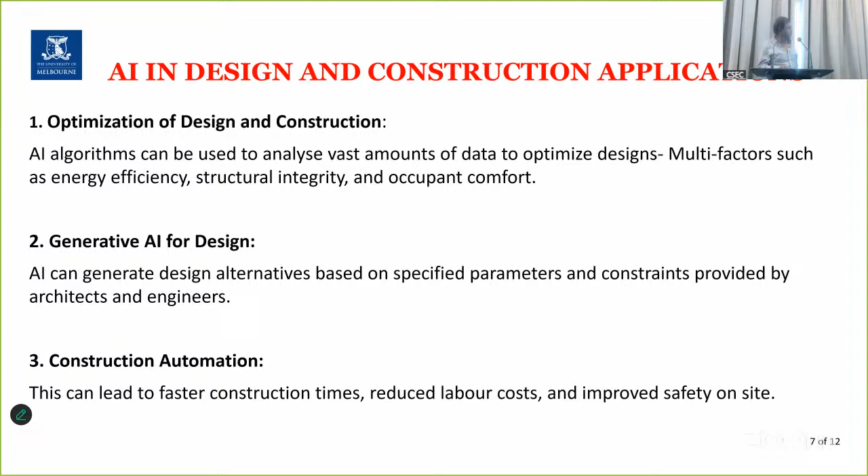Predictive analytics, that's where I think it will make the best contribution. AI, using the past building performance to predict future needs, and optimize operational efficiency. So, making predictions.

One example I can give is developing a site, using the best construction methods and technologies. Developers need to make some rough predictions of how much they should be spending on a project. With AI, for example, we can say: I want 20 stories, a building with so many apartments per floor, a certain number of 3-bedroom apartments, 2-bedroom apartments, and certain other things.

We give these instructions to the AI model, and it will give us the best optimized option, optimized layouts, and a rough estimation of the cost as well. All of this is built in, taking care of a lot of things we don't need to worry about, which if done manually would take a long time.

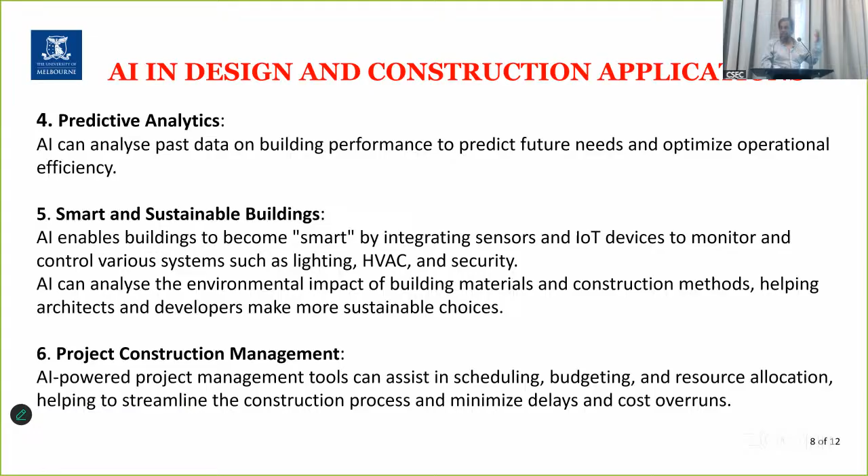I'll give an example of a digital twin, which makes construction management very easy and will reduce construction times. As an application to start with, this is CSEC has used - taking examples using the program Midjourney for generating generative designs, architectural designs.

The key features are automation and efficiency. You can optimize designs using AI, like a Midjourney type of program, enhancing processes, design option generation, and accelerated design process, which reduces the time we take - that's what I mean by making things efficient. It also allows us to bring different concept options and supports sustainability.

We want to be sustainable, we want to get to net zero - you may have heard one of my talks on net zero, but today is a different topic. Even AI can be used to help us achieve net zero quickly.

Now it's all about what's called text to imaging - that's where it really helps us. We give the text and get visual images in return. I gave an example before - we say we want a 20-story structure, and we give that in text. We type it in, and now we can use ChatGPT and all that to really go and type these things. So text to imaging is the key.

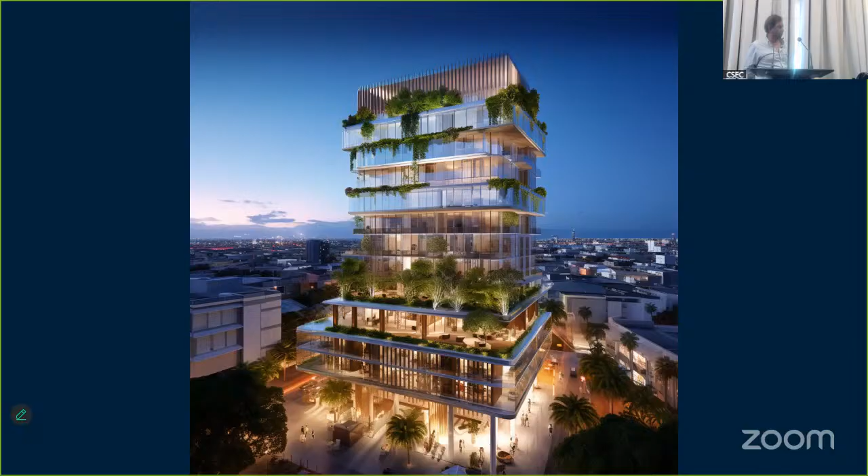I'll show some examples, case studies. Say we want a sustainable building, a green building. So we go and say, this is one of the examples generated here in this office, giving some of the options. And we say we need some greenery to make it sustainable, and we may say we want a green roof to get into a certain green rating. So with...

So many different things - we can't ignore sustainability these days. Sustainable buildings will become compulsory, or it's already becoming compulsory. To achieve that, we can use AI to fine-tune that and even give options. In the future, it's not done yet through these programs, but we can say we want a certain green rating - here in Sri Lanka we have a green building rating, but other countries have different ratings. We can say we want a rating of 6 or 7, or platinum or gold rating, and then get outputs. So these are through text - we talk to the computer through text and get the images back.

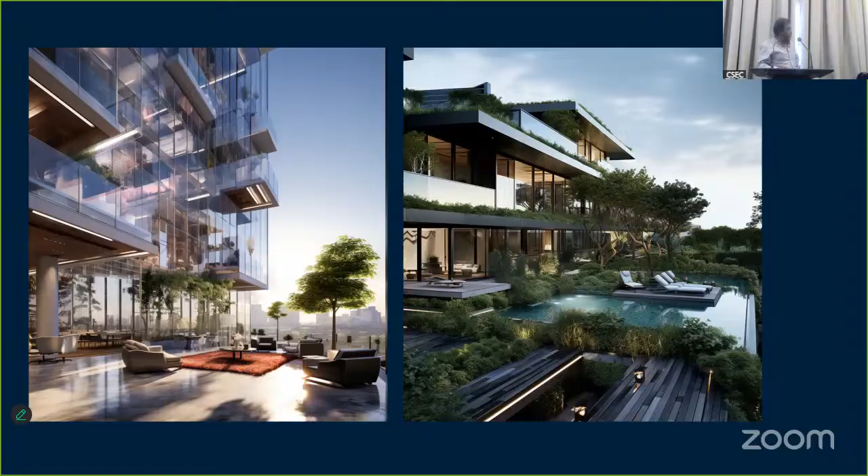Some of these options here were created from the Midjourney type of program. Today I'll only be brief on this, I have a lot of other things to talk about. Say origami type of structures we want generated - it would have taken ages to do this before, but now we just use AI. Hotel interiors, which is not easy to get the best interiors, but learning from past experiences and past mistakes, we can really come up with nice interiors. Interiors are in fact so important.

I'm going to get a bit more into some applications - today is all about applications as well. For example, forensic engineering - AI will help us a lot here. This is one example where there was a chemical factory fire in Melbourne. I'm taking this as an example of technology and forensic engineering in different ways. I was not involved in this one, so I can't present the ones I was involved in, probably not allowed. But this was in July last year, very recent.

So to find the causes, to find what happened, AI will go through some past data - how fires occurred, types of fires, all that AI will have. So we can use AI to determine why this happened. Rather than spending years and years on investigations, AI will give us some idea. This really makes forensic engineering easier - that's also a common thing now.

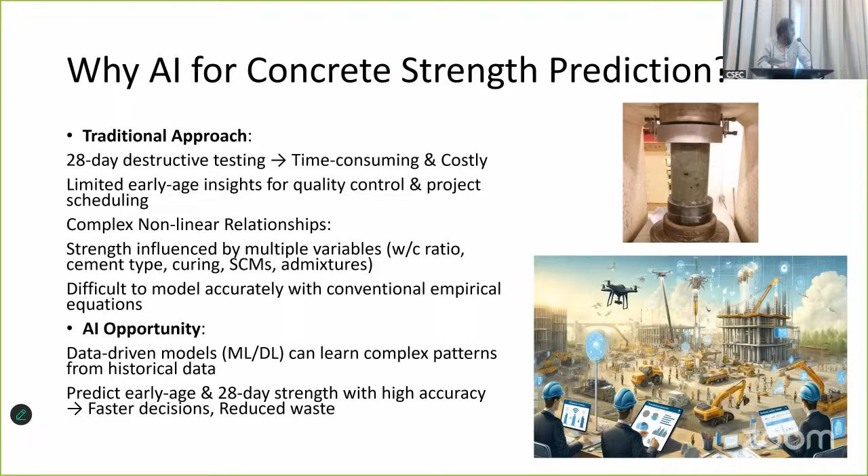So predicting concrete strength is very important. If you want to post-tension a beam, you want to do that in a few days, so we need to predict the concrete strength in 3 days. Sometimes we want to do the post-tensioning in 2 days, and that's very hard to predict. We can't wait to do the testing at 28 days from the concrete company.

So what we can do is fast predictions. We have so much data, we are collecting so much data every day - why not train a model? That's what we are doing here and also in Australia, trying to improve these AI models for concrete strength prediction. I'm sure there are others in the world doing this too, not just us.

So we are using some popular AI models, AI algorithms - you don't need to worry too much, but these are past AI algorithms that we input into. We have these tools now, we can use them. We're using random forest models and some other standard, popular AI models that have been used recently, and there will be published papers.

The advantage is that Annie's father, who was well known to me as well, is a well-known professor in China on deep learning. His area is computer science, and he's helping us with this work. So we are getting very nice computer science input from him and also from his students.

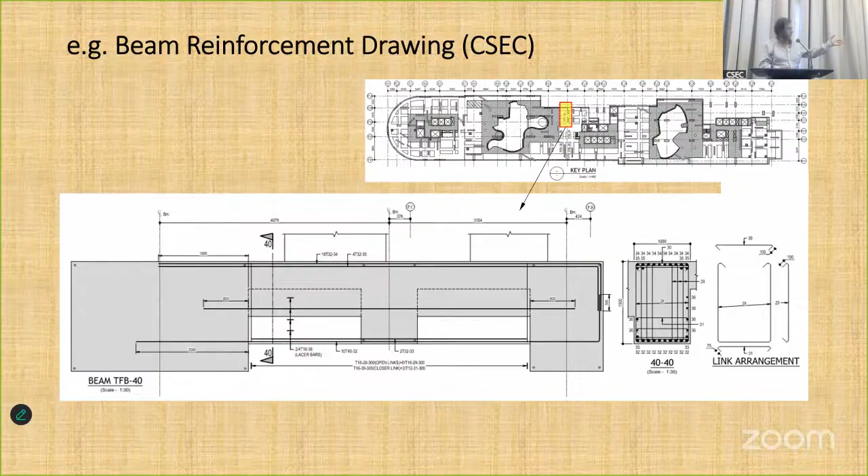GANs, generative adversarial networks. It's really, we know Gen AI. When you put together different Gen AI machine learning models to get into the GANs, these are words you will get very familiar with in the future.

So these sort of examples we can have with our own needs. We give in text what we need, and it will come up with the floor plans. So AI can be used. We can read some of these references, read the paper I gave, our paper, you will see the references there for this sort of work. If you're interested in that work, today I will not go into it.

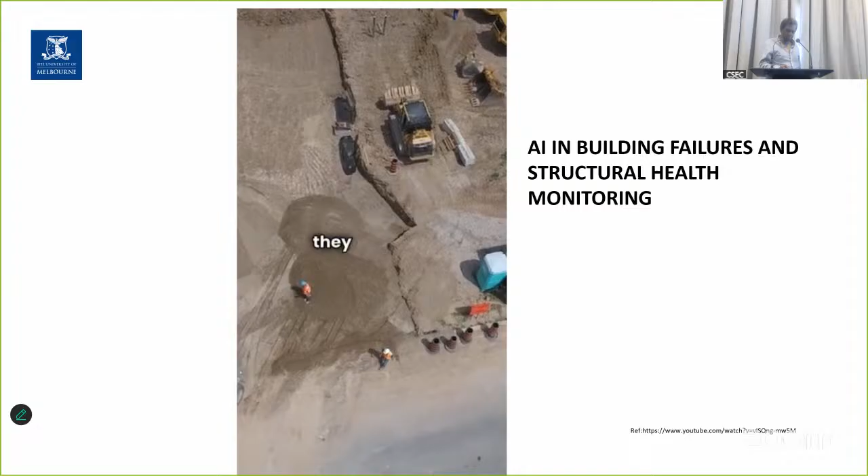Ever wondered how we can predict structural failures before they happen?

So again, there are some examples going through some of the work done in the world, again using different technologies on construction sites, as I said, to introduce them. This difficult site example is based on Spanish work. You can read the paper and get the reference from our paper that I gave, and that reference refers to looking at the reinforcement layouts, checking all that, identifying the workers on site and monitoring their productivity.

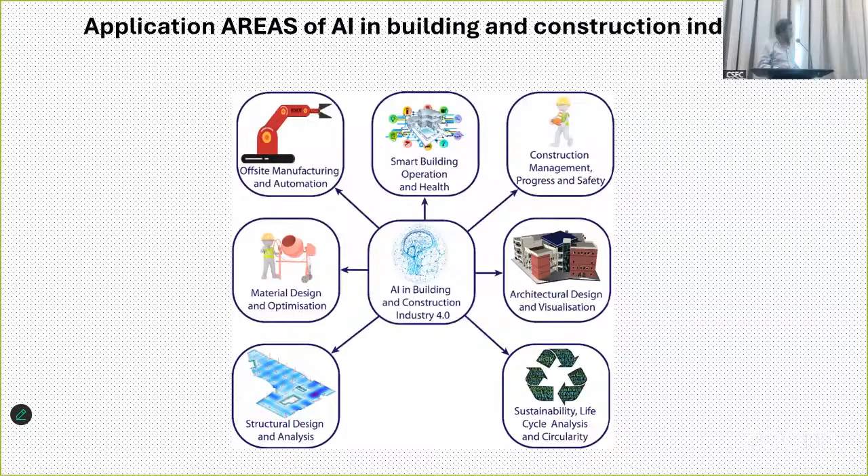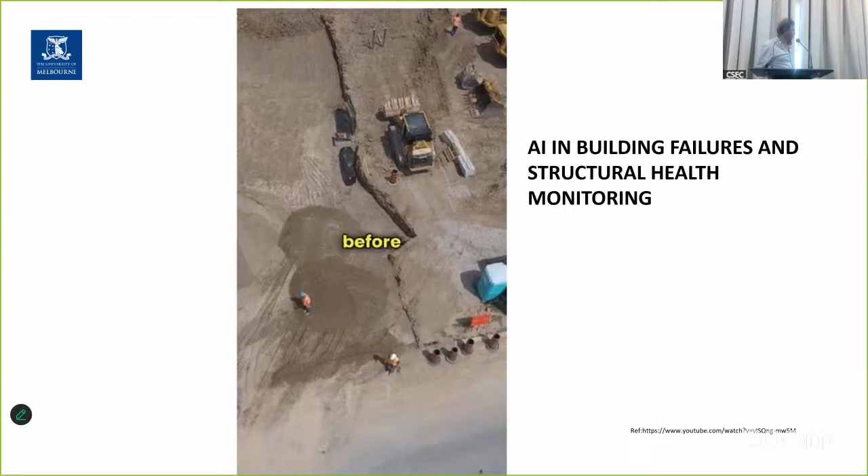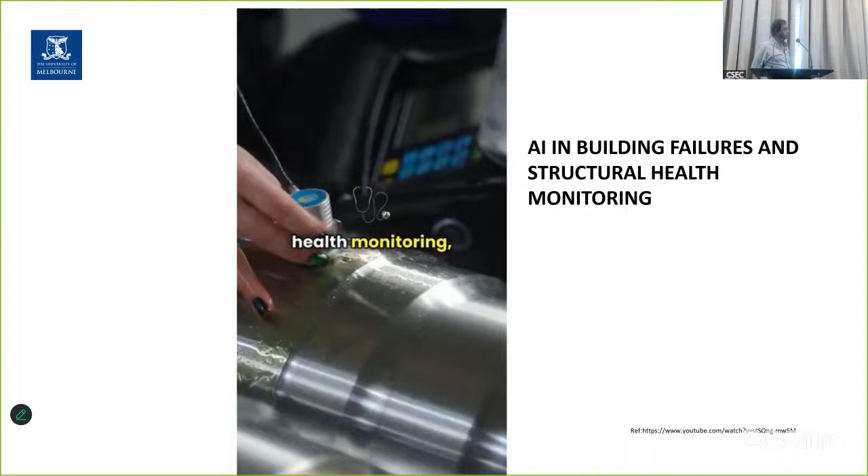Ever wondered how we can predict structural failures before they happen? With artificial intelligence, engineers can now foresee potential issues in buildings, bridges, and other structures. AI analyzes data from sensors, monitoring stress and vibrations in real time. Machine learning algorithms detect anomalies and predict failures, allowing for timely maintenance. This revolutionizes structural health monitoring, making our infrastructure safer and more reliable. AI is saving lives and preventing disasters. Stay tuned for more amazing AI innovations.

So this is a topic, as I said, what we are doing now with engineering and architecture, that joint project where especially myself and Dr. Paolo with another team, we're looking at building failures and how structural health monitoring can really help us improve and address those building failures. These days we are sometimes compromising quality, and people are trying to reduce the cost by compromising quality, which is really not the best thing.

So with all that, we are using structural health monitoring to monitor the existing structures, whether the existing structures are all right. And that video you saw how NDT, non-destructive testing, can be used. Also, learning from past failures, making predictions on how this building is - let's say we want to assess this building, if we want to really do something with this building. So learning from the past, using non-destructive testing, we can make some assessment. This building is quite relatively new, so we don't need to do that, but old buildings especially, we need to really look at the structural health.

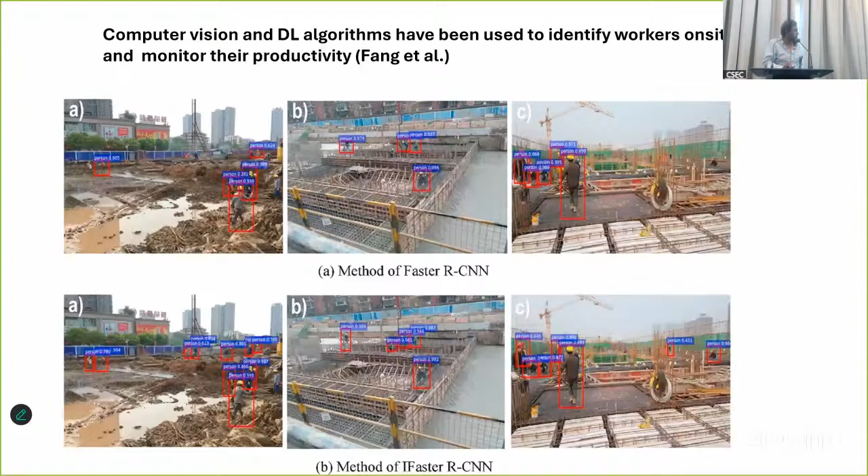Similarly here with that. Yeah, we'll move on to the next one. Yeah, moving in the wrong direction. Ever wondered how we - going back?

Yeah, okay, so construction safety. Let's go very quickly as we are running out of time. With construction safety, we can use this sort of work to really look at safety, monitor the people, and that's based on some of our work. Our team has done this one, the unsafe behaviors on construction sites, looking at the productivity of the people. We can use AI to really monitor them and see whether they are doing things safely or not. This is our lab.

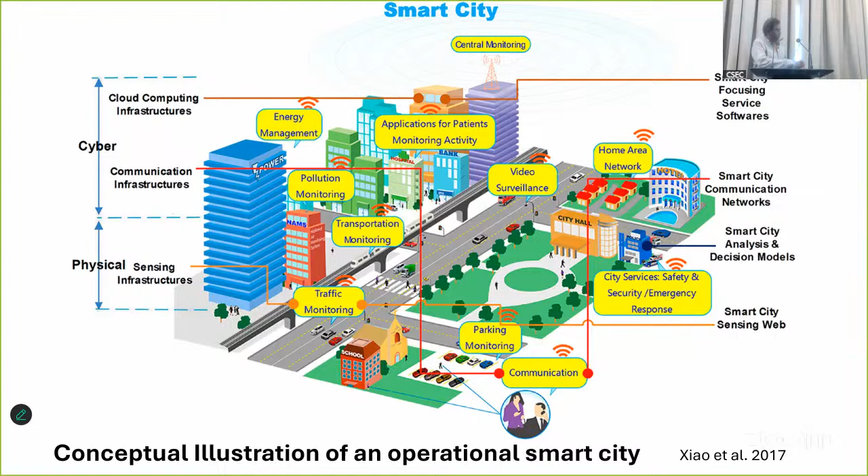We'll go to the next slide. Yeah, so anyway, getting to very quickly on smart cities, we can look at that. We'll put all this together and look at smart cities. Again, read our paper, you will see a bit more detail of this one. Using AI, bringing all that together to build smart cities - I'll leave that to another day. A bit more explanation: we can bring all that through AI-based, as I said, adversarial networks, bringing some machine learning models for each activity and bringing them together to really make a smart city, an AI-based smart city.

Next one. So let's go through some optimization, construction technology, using technologies with optimization with AI. Next slide. So digital twin, which we can't avoid. So we can play that video.

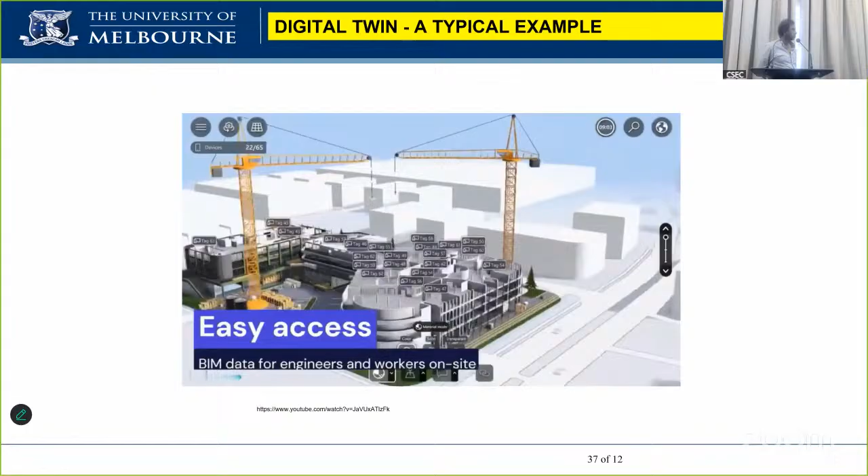So in the future, I can predict that with this sort of work we are already doing - even here, some digital twin models are being done. With CSEC, it's really coming up with a total project where really everything is put into this 3D model. Revit type of program can be used, and there are some specific programs as well for digital twins. Once this whole procedure is modeled there, all the monitoring can be done, even the procurement and storage on site. So everything will be done through this digital twin model. The real construction site is really simulated by a digital model, which will really be used to take all the decisions.

In a couple of years, maybe 5 years, you'll see in a project management or construction management meeting someone showing a digital twin, saying 'this is where we are.' We're already doing it, but it will take maybe 5 years to fully come into the industry. That's my prediction, but AI is coming in a big way.

Next, this is a project we did with CRC, with CSIRO and a lot of big companies in Australia. We had an ANU student accommodation project.

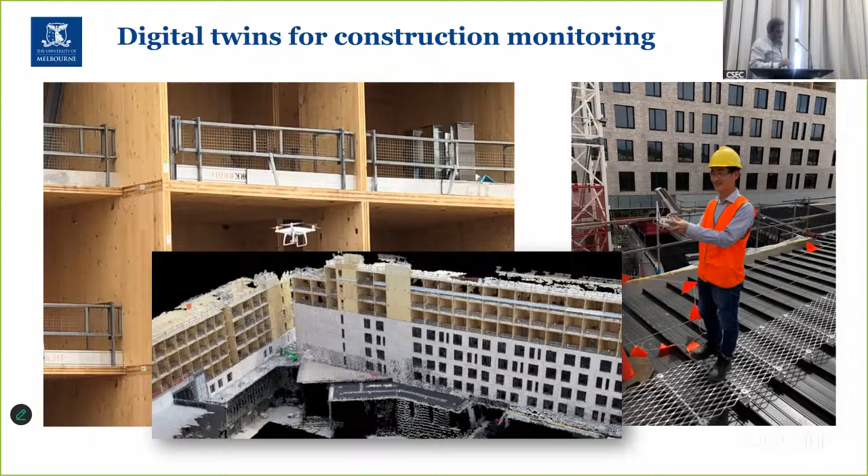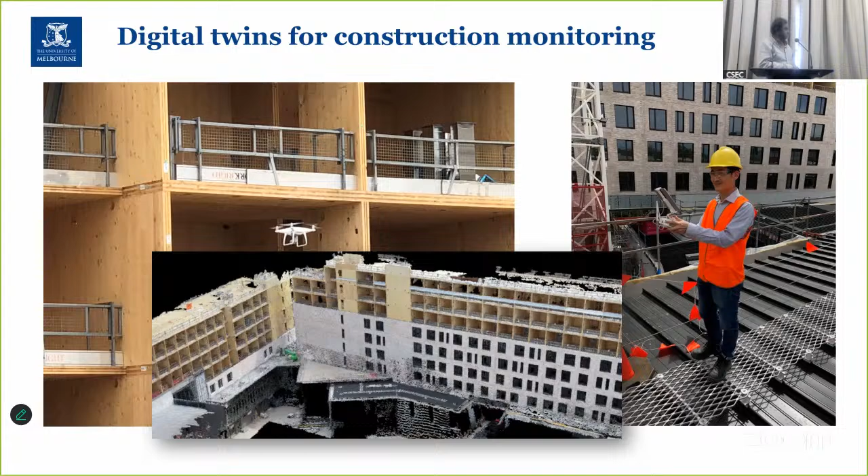There's a digital twin for construction monitoring. We had a digital twin model of the construction site, and we were doing monitoring of the construction with some sensors to see the performance and progress. That work was on facades, but I won't go into detail. We've developed some models and methodology for how digital twins can be used, with that particular CSIRO project. That's the digital twin model.

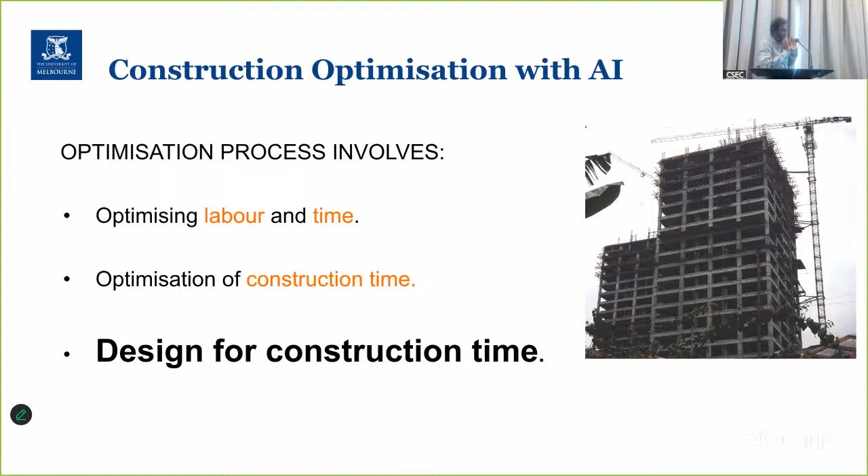Quickly on construction optimization - I call it design for construction time, optimizing the labour and time and the construction time. Again, we can use AI to optimize labor. The whole thing is learning from the past, making predictions, and planning, so we can take decisions using that.

Everyone should keep an eye on this and try to think about how AI can be applied here. There are some tools too - you can put the words 'labor productivity' into GPT or similar and get some information. Use AI to learn AI, right?

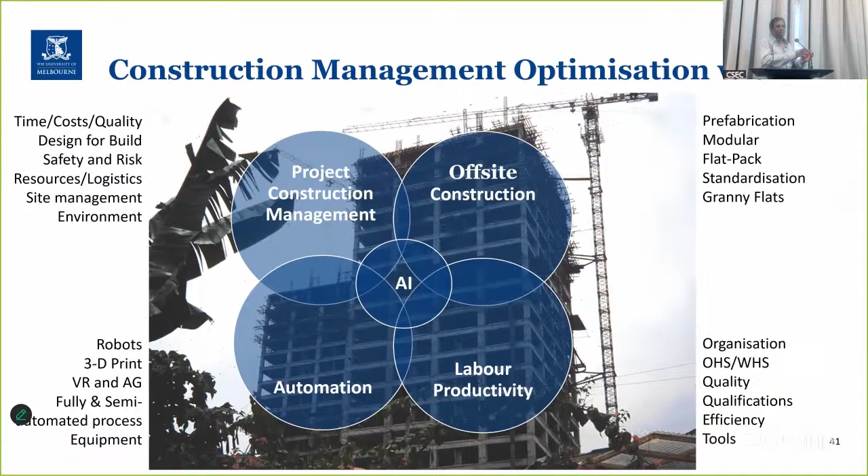Offsite construction - modular, done in a factory and brought to the site. I have spent lots of time using precast panels for fully 3D type modular structures. I gave a talk in the Meet the Expert series in Thailand at AIT - that's on YouTube, you can look at that offsite work.

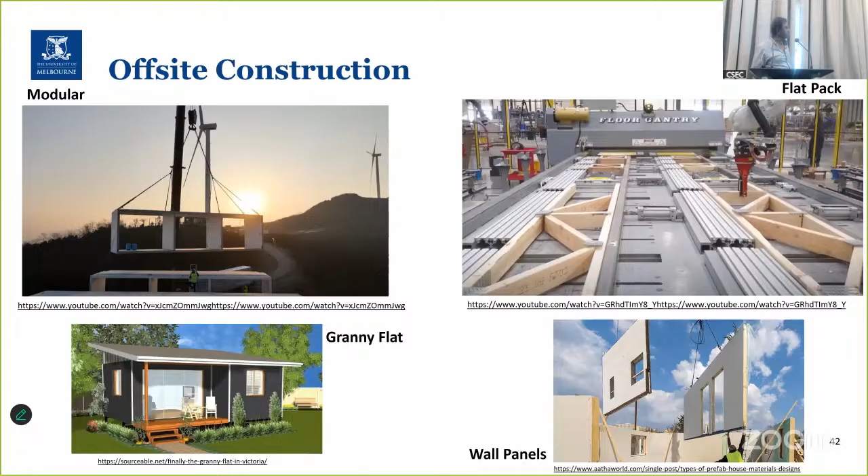AI in construction - a lot of things that happen in the future will be done on site. Right now we can do 3D printing in the lab, no problem at all, but doing it in the field is what really needs further development. We can also do it in a factory and bring elements to the site - that's also possible using 3D printing.

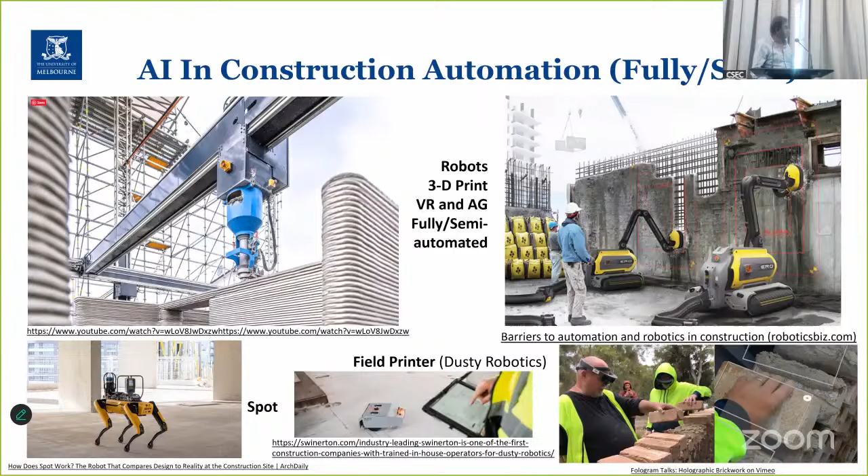AI can be part of the solution supporting our activities, leaving home for a construction site or anywhere, collecting the correct tools that you need for the day. AI will give that. Traveling, we have the car navigated by AI. Arrival on site, performing the work, we've got AI for many things. And even leaving, right after that. So a whole day of work will have AI really helping us as the best friend to guide our day. This is happening now, but in our construction sites it will also happen regularly.